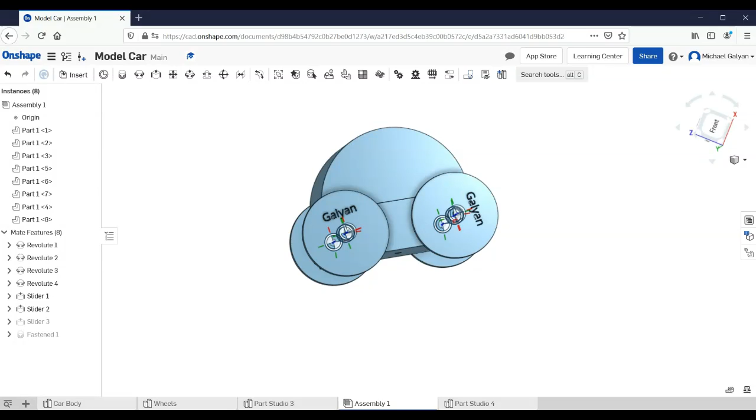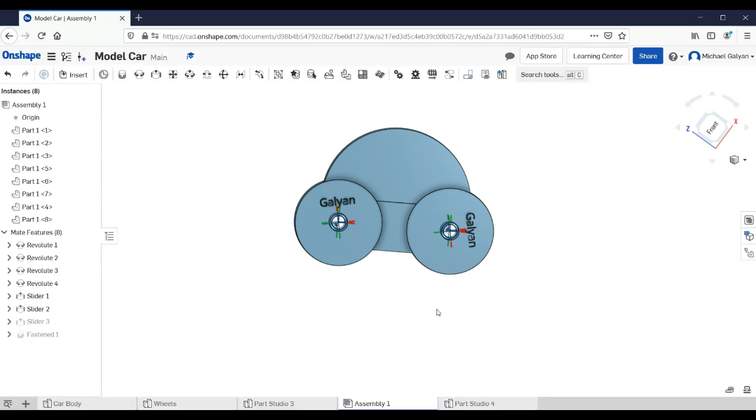We were building this model car here on Onshape, and we left off here with this car. When you start working on 2.1.4, it's going to ask you to make a drawing, and there are a couple things that'll make life easier for you when you go to make this, because there's a couple problems that I found out. People were like, hey, I can't get this to work. It's not working right. It doesn't look right. And I went back and I noticed it too.

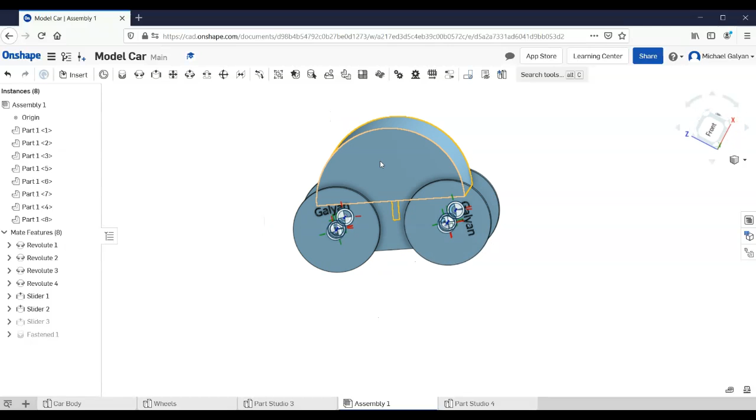So the way you make a drawing, we've got our nice assembly here. Again, we've got our car, 4 wheels. Remember, we have the axles. We've got this top part here. And actually, I'll show you the top part. If I didn't get to show you the top, I'll show you real quick the two mates that put that top together. So the top is just right here.

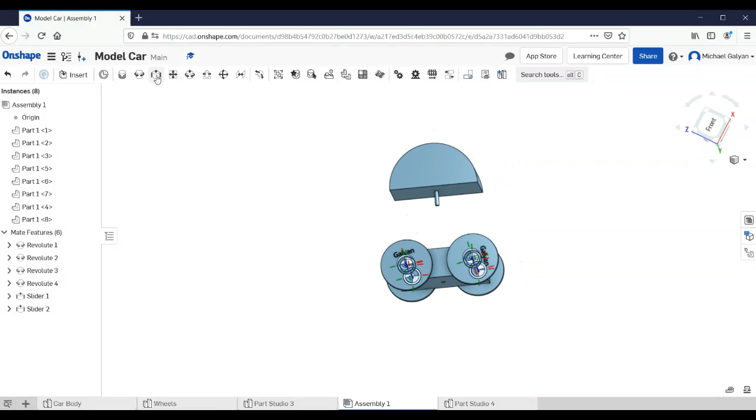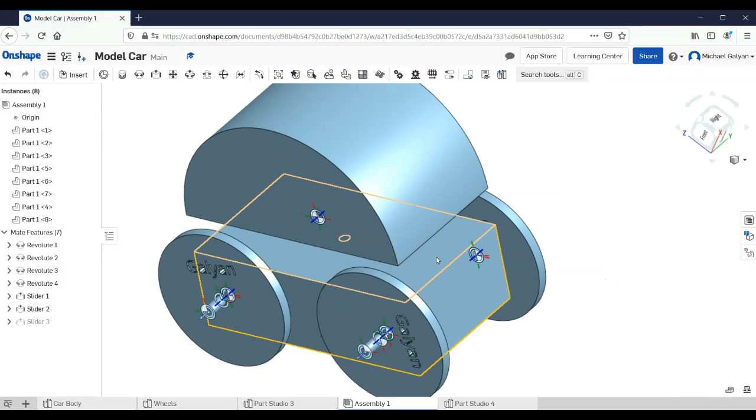The two things that we use to put that together are a slider mate. So we pick a slider and we zoom in, we select that. Oops, it'd probably help if I zoom out a little bit. And then we select that. Okay, and that puts that peg in the hole, but if you notice here, it's not flush. So we're going to do a fasten mate here. And then that will let us select this face and then rotate and select that face.

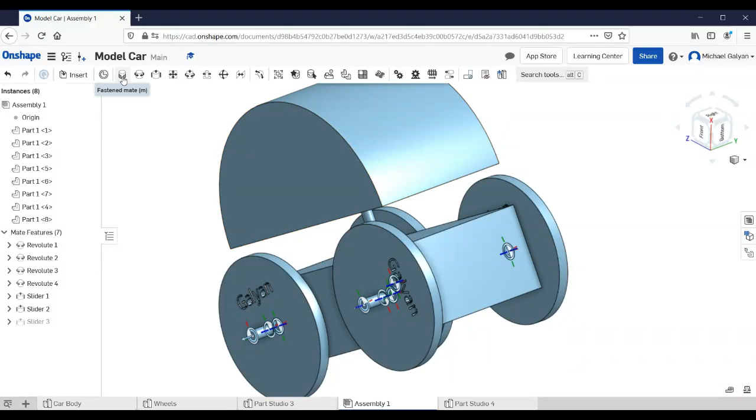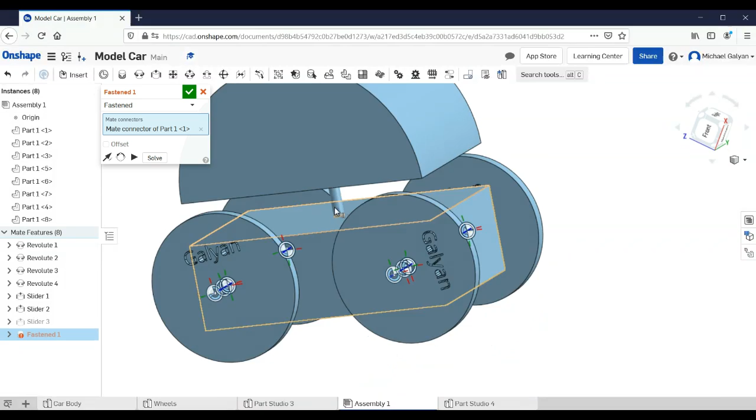And that did not do what I wanted it to. Hold on here, let me try that again. Fasten mate. Select that. Select that face. Select that face. It's doing it again. Hold on here. I just had it. There we go.

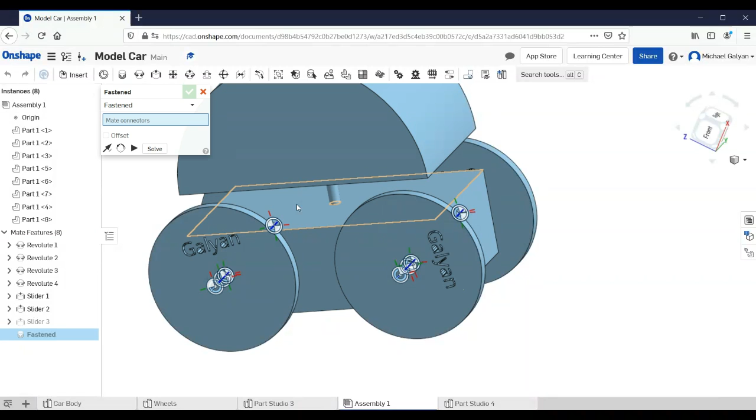I had to get it where when I highlighted it, if you look at this mate here, notice how there in the circle, that little thing, when I first did it, see how that little thing there tells us that we can mate that? Well, I just undid it. There, now I can do it. Same thing here, and we're good. So that's how I did that part.

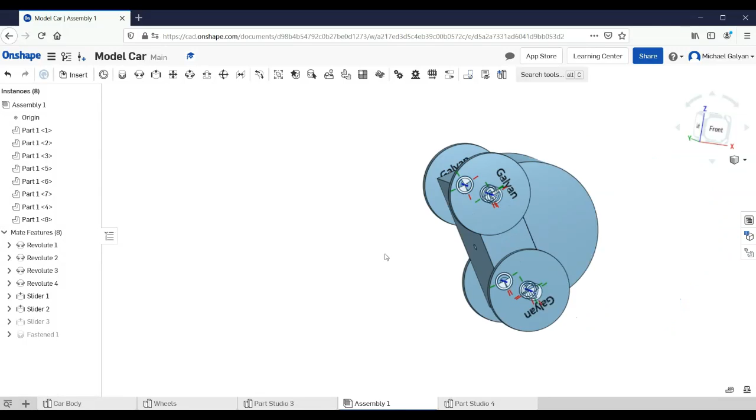Now, we go to make a drawing. Okay, wonderful, so we look at that as our thing. When I click front view up here, this has been part of the problem, the car is at this angle like it's doing a giant wheelie. And when I go to make a drawing and I click the plus sign down here in the bottom left corner and click on create drawing, and you want to select ANSI B inch, that'll be fine, hit OK. What will happen is my car will look like it's doing a wheelie in my drawing, which is not what I want.

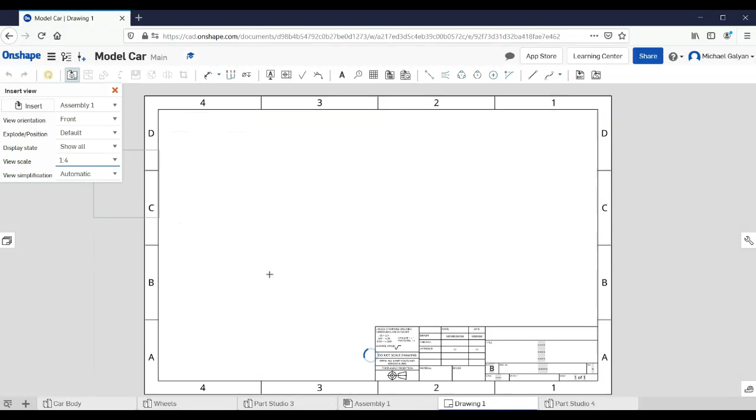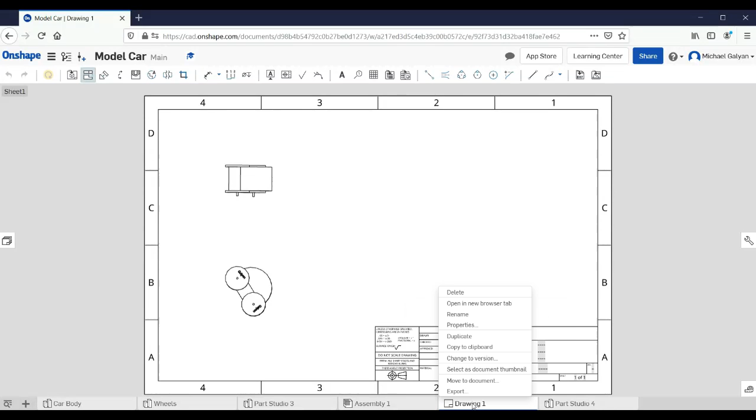So I have the drawing here, and I'm going to select my assembly. Assembly 1, the default here is a front view. And what you notice is if I lay that in there, it's got my car doing a wheelie. And if I put in a top view, the top view looks weird because it's got the car at a wheelie, and it messes it all up. So what we're actually going to do is fix that here in the assembly before we start doing anything with the drawing. So we're just going to go ahead and delete that there, and we'll go back to our assembly.

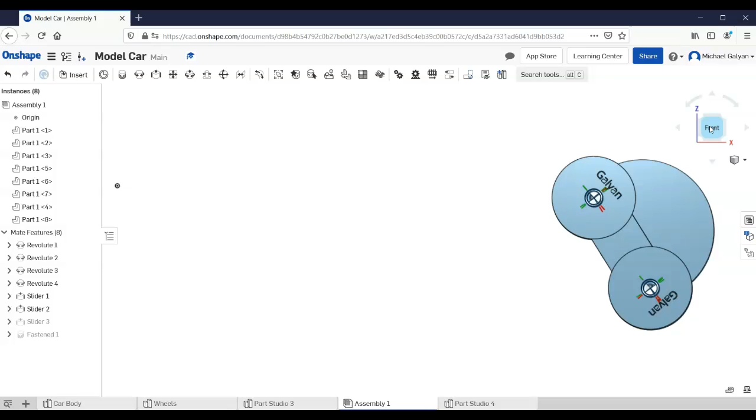And the way we do this is you always want to build everything off this front view. So we're going to take the body of the car, because we constrained everything to the body of the car. We constrained the wheels to it, we constrained the axles to it, we constrained the top to it. We're going to take the body of the car and rotate it so that it's oriented the way we want.

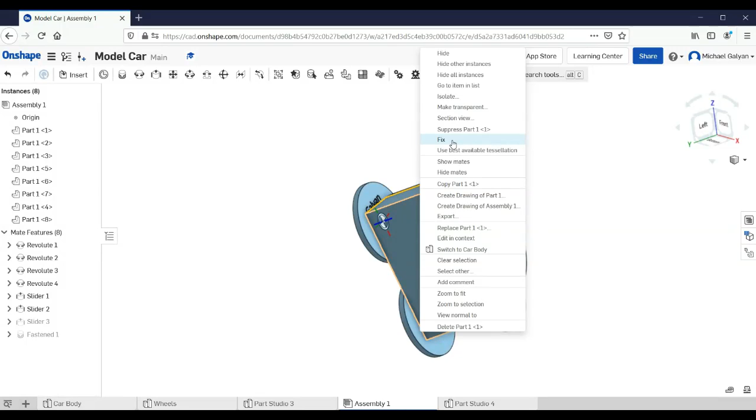Now, ideally, when we first build this car, we would get the body oriented how we want, and then we'd use this tool right here where you right click and hit the word fix. And what it'll do is lock it in place so that it's always the way we want it. But most of us didn't do that because I didn't tell you to do that, and we don't know how to do that. So it's okay.

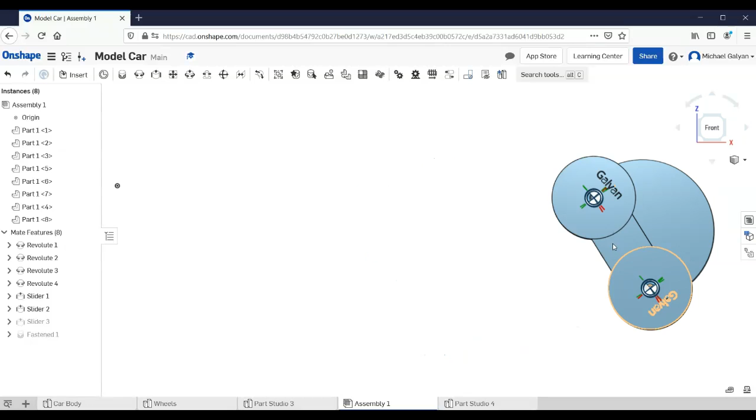We'll get this fixed. Now, what we're going to do, we're going to click on this, and when you click on it, let me get it actually in an angle. So when we click on the body, notice how there's this circle with these arrows coming out of it. Those arrows are the directions, X, Y, and Z, and these little circles with lines on them on the end are ways that we can rotate the car.

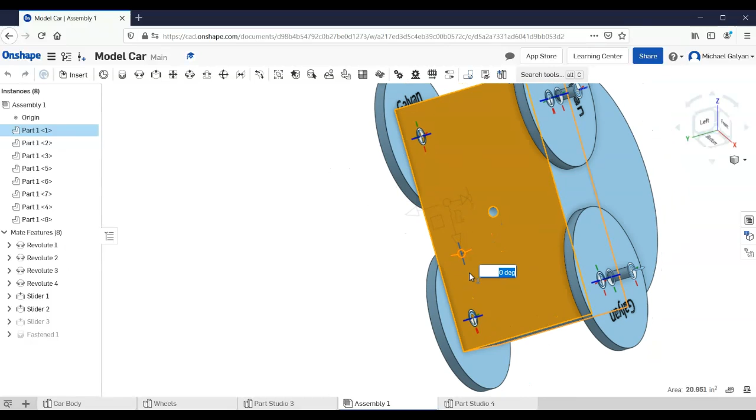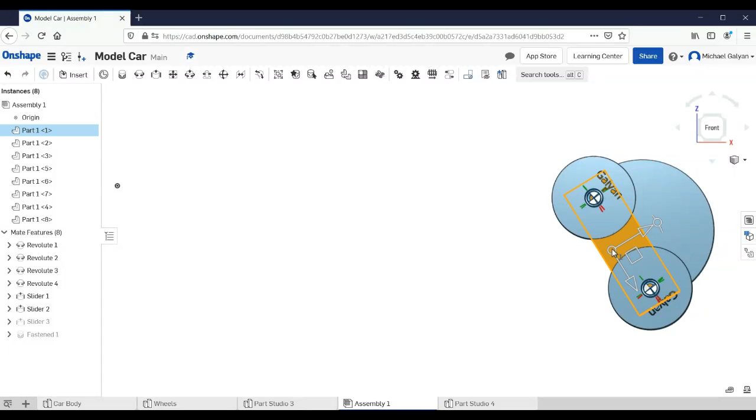So if I click on one and start dragging it, notice that the car rotates. And don't worry about the axle coming out right now, it's not a big deal. So what I want to do is use those to try to rotate the car to where I want it. In this case, all I have to do is rotate it down about right there. And that's got me about where I want it.

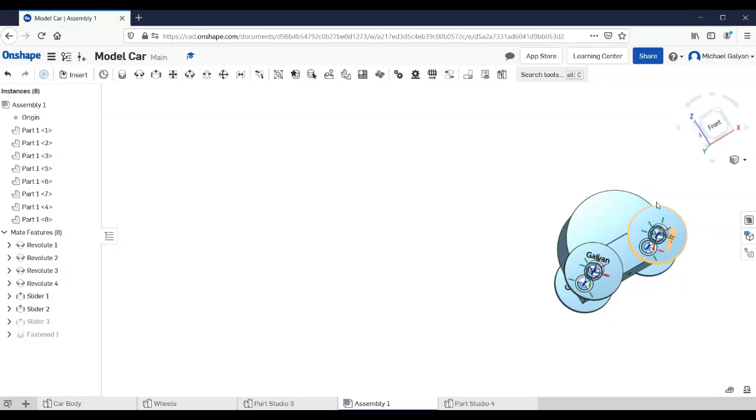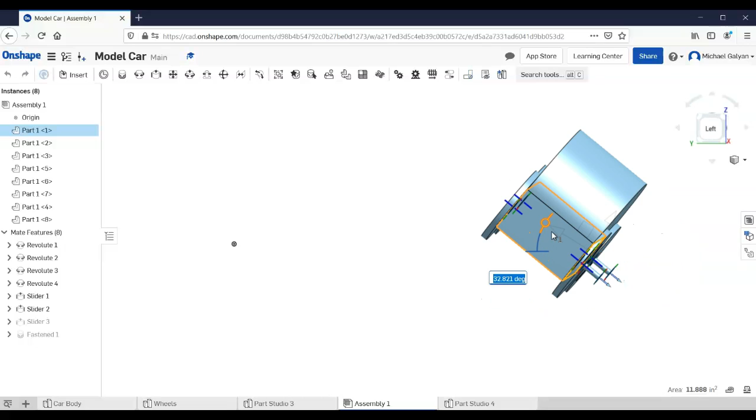Yeah, that looks good. When I click front view, it puts it there. I don't know why it's offset. But you may need to do some others. So you may need to use this one and rotate it up or back or whatever way you need to rotate it. You could just click it here and rotate up or down if you need to. And you can even type in and get real specific with the degrees that you want.

But once you get it the way you want it, then we're going to find the front view, click front, and then we're going to click on that, and now we're going to do our fix. And it'll fix it exactly where we want it. Now, I've got it all set up. I've got it where I want it. Now I can go and start doing the stuff that I want to do with this.

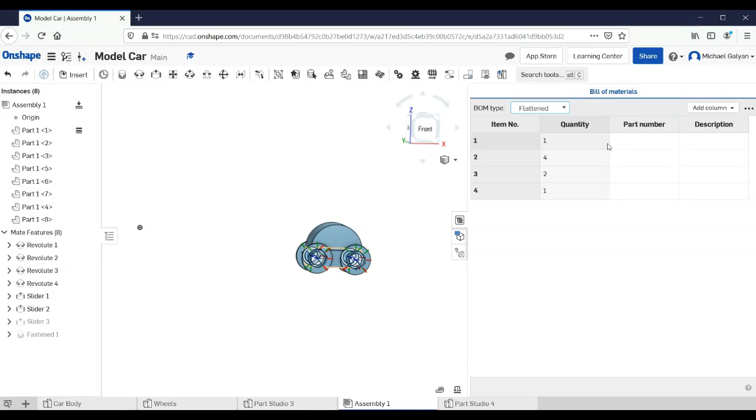Okay, so the first thing I want to do is over here on the right, you see these little things that we've pretty much left alone the whole time. BOM table, that's bill of materials. I've already updated these, but here in Onshape, it's called a bill of materials. In Inventor, it's called a parts list. You see item number 1. That's your car body. That was the first part you made. There's one of them. And you can type in a description here, car body, to tell what it is.

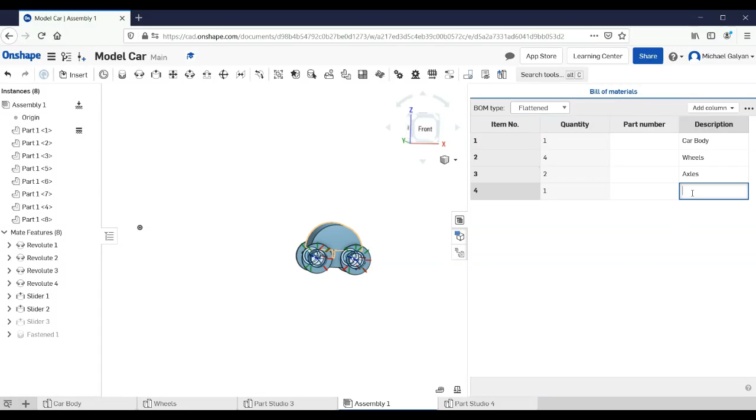Item number 2, that was the second thing I made, which was the wheels. There's 4 of them. You can put wheels. Item number 3 was the axles. So we can put axles. And item number 4 was the top of car. So we can just put top of car. And we're going to leave those descriptions there.

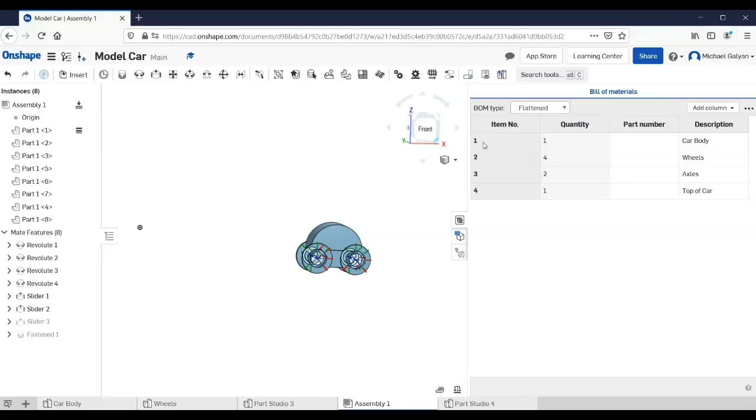And while you're probably not going to forget the parts in this little thing, when you get into bigger builds where you've got 10 or more parts, it's nice to have that bill of materials. You can quickly click over here, and when you see the different parts, you can see what they are. It's also going to help us with our drawing, as you'll see in just a second.

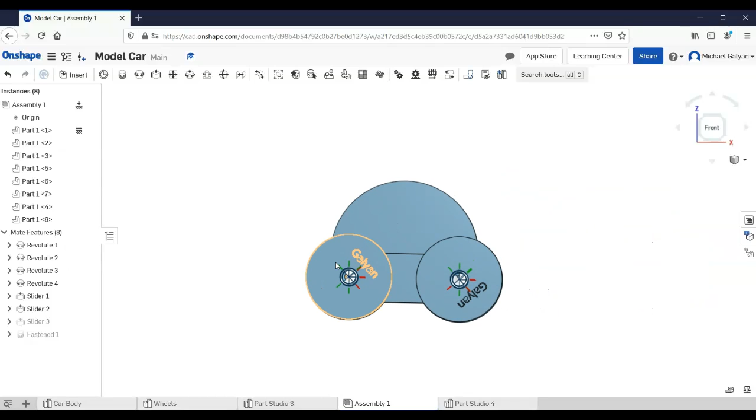The other thing we're going to do is make an exploded view. An exploded view is where we take the different parts and explode them out so that you can see all of them and see how they fit together. Now, unless there's a way to do it that I still haven't figured out, which there's a very good chance of, I don't like exploded views on Onshape very much. They're not nearly as good as the exploded views on Inventor, but they'll have to do because that's what we've got. So you click over here, you have bill of materials, configuration panel, and exploded views.

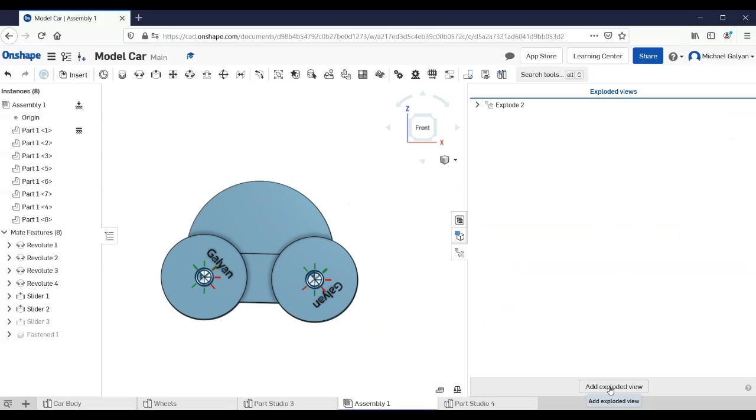With exploded views, you can hit add exploded view. They're just calling it explode 1. With explode 1, you're going to click on each part individually, and then use those arrows to drag it away from the rest of it. And then hit the check mark. I'm going to click on the wheel and drag it away. Hit the check mark. And I'm going to click on this wheel, drag it away. Check mark.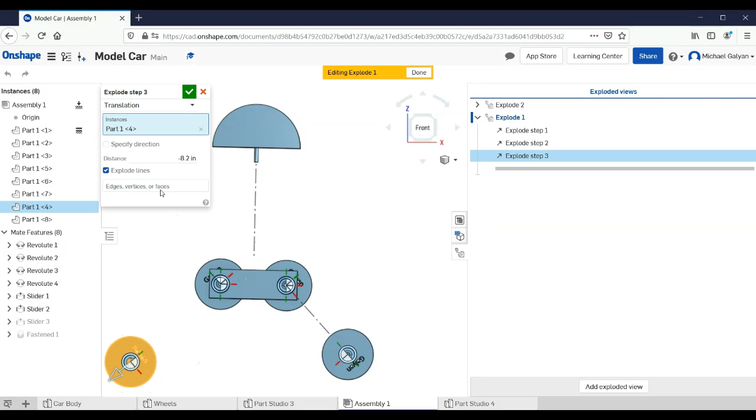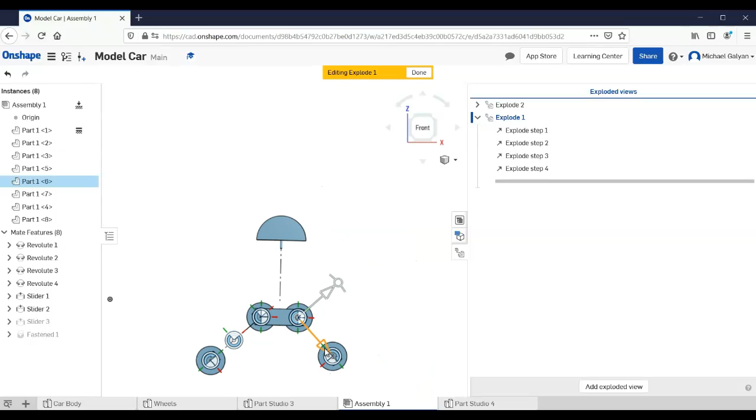Now I'm going to do the axle. Oops, not too far. Drag it away. Check mark. That axle. That wheel. So what I wanted.

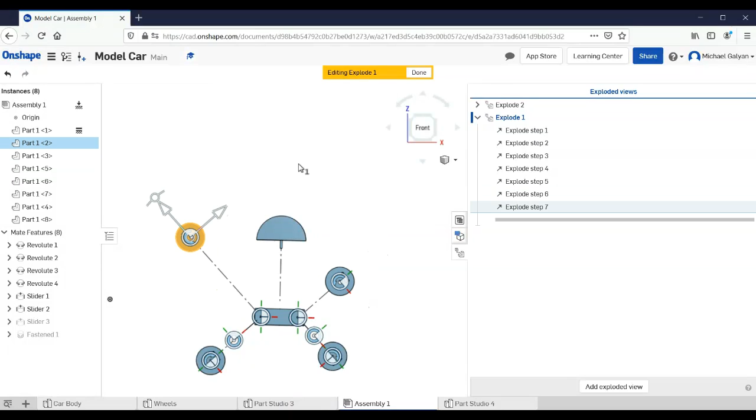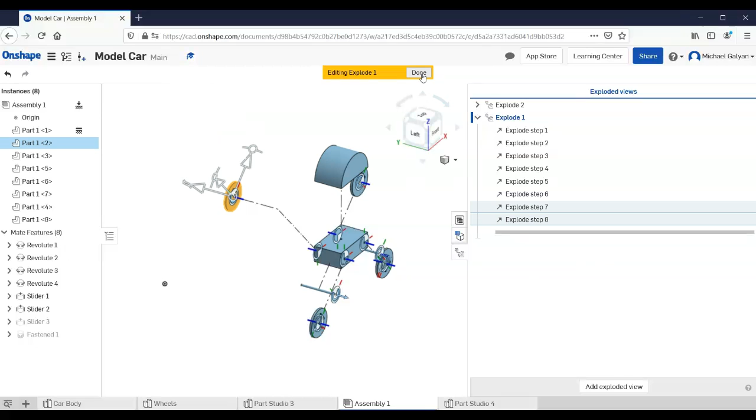And now, the reason this is handy, then we can hit done here. The reason this is handy is if I say explode 1, I could look at it here and I could see how all these different parts fit together, how they all come when they all fit together. So I've done that, and I can hit done when I'm done with it. And it'll take it back to a normal looking vehicle here. I can go back to my front view.

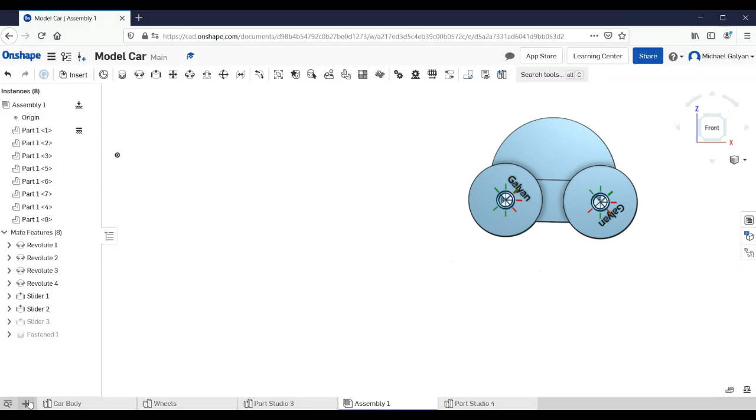Now, what I'm going to do is I'm going to finally make my drawing. Now that I've got everything the way I want it, I'm going to make my drawing. So I'm going to hit create drawing here. Again, my ANSI B inch is what I want for the template that I'm using. You may have to search a little bit to find it, but that's what you usually want. Again, I have slow internet here, so it's taking just a little bit longer.

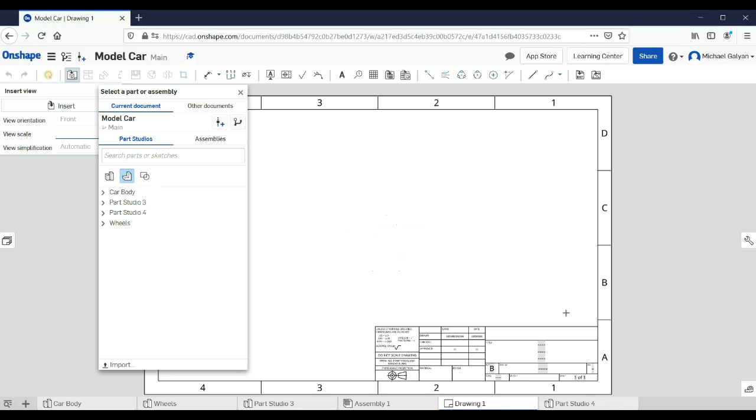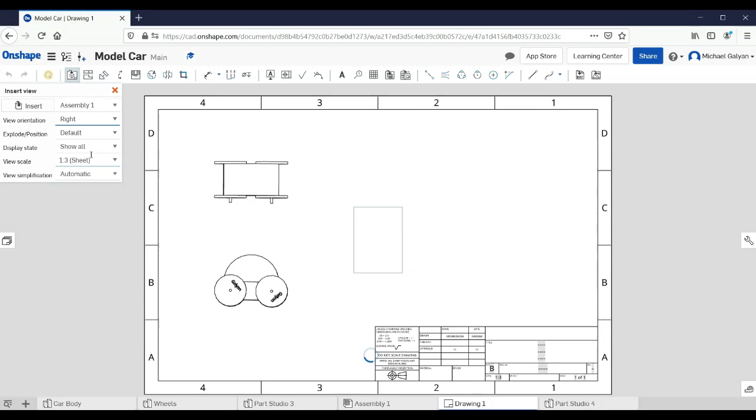So with the drawing, assemblies, I'm going to choose my car again. And you'll notice now my car is in the correct orientation. So my front view goes there, my top view goes there, and then I have to click over here, insert again, and if I want a side view, I click on right, and I can put it right there. Okay, and I've got my car all inserted there. Computer's thinking about it for a second.

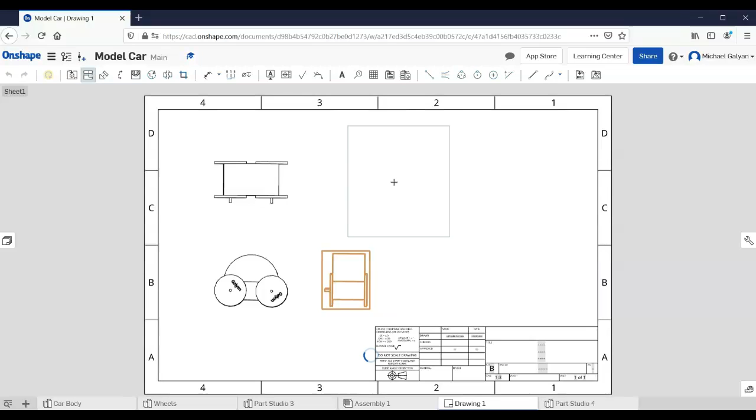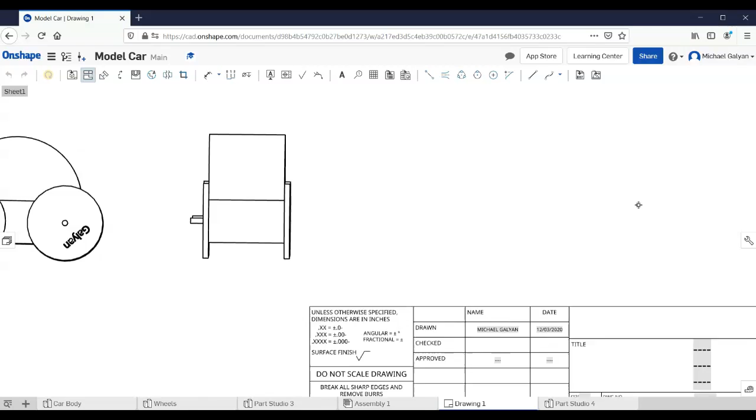Now, what I'm going to do, I can put an isometric view right up here if I want. There we go. And so now I've got my multi-view drawing here. You notice a couple things about the sketch. It tells important information such as my name, the date. I don't know why it says 12/3 because it's only the 2nd. Unless this is thinking I'm European or something. And then you could actually click and you can change some of this stuff. You can put notes in here and change the title, materials, things like that.

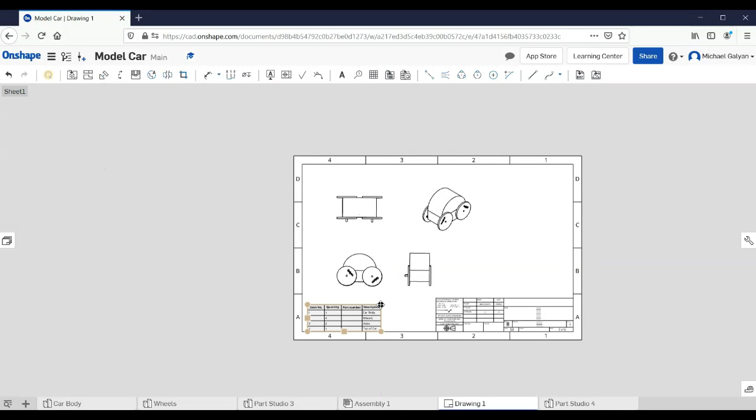But what we're going to do first is a couple of things. So the first thing we're going to do, we're going to put a parts list down here. So if I go up here, there's a tab that says BOM table. And we filled out that bill of materials. We're going to put that down here in the bottom left corner. And you'll notice it now has each part. It's got the quantity of the parts, and then it has a description, so what the name of the part was there. So now, if I've got something that's 10 or 12 parts that I've assembled all together, I can see what part is what.

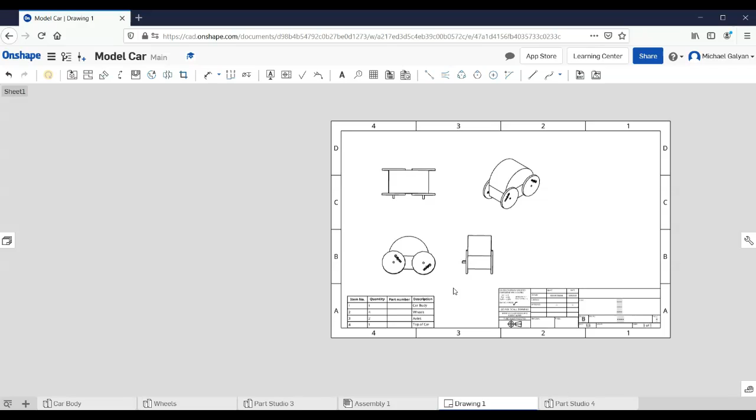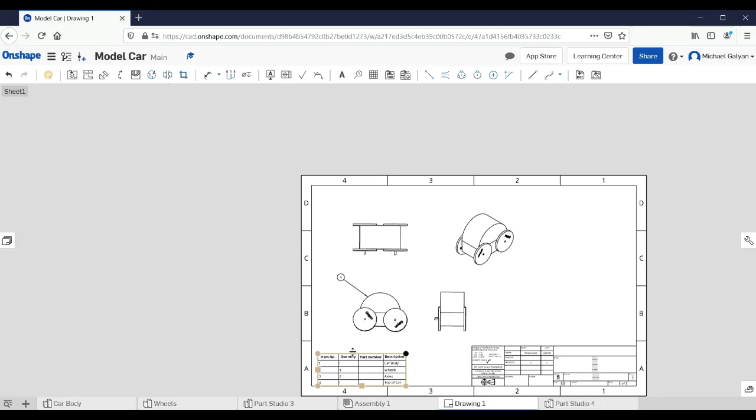Now, the other thing that's going to be handy with this is I can use these little balloons. They call them callouts here. We call them balloons on Inventor. And I can click on these parts and notice that it's now made number 4, which was my top of the car. It automatically knows that that's number 4. If I want to do my wheel, it automatically knows that the wheel is number 2. Now, I do not have to do all the wheels. I can get by with just doing one. And then I can even do this. And I can do the car body.

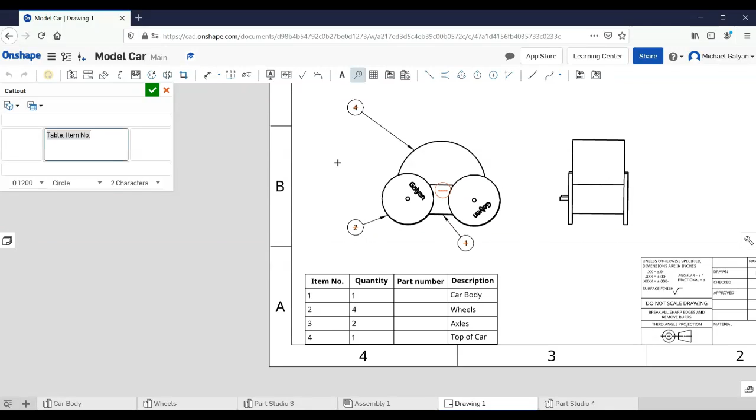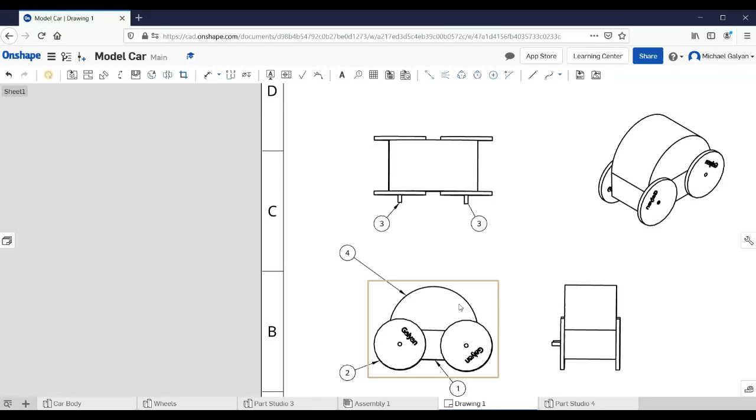Now, we can't really see the axles very well from that view. So what we're going to do is we're going to go up here to this view. And we're going to find our axles on this view. And if you've got something that's hard to see, if you want to show that both axles are there, you can do that, and it tells us that those are both part number 3. So this will be handy if you've got a bunch of different bolts or screws. You could put each one in and say, hey, this is exactly what it is. But notice again, the computer knew part 1 was the car body, so it automatically made part 1 that. Part 2 is the wheels, and every wheel that I make a callout of, it will make it. Well, I clicked on the car body there.

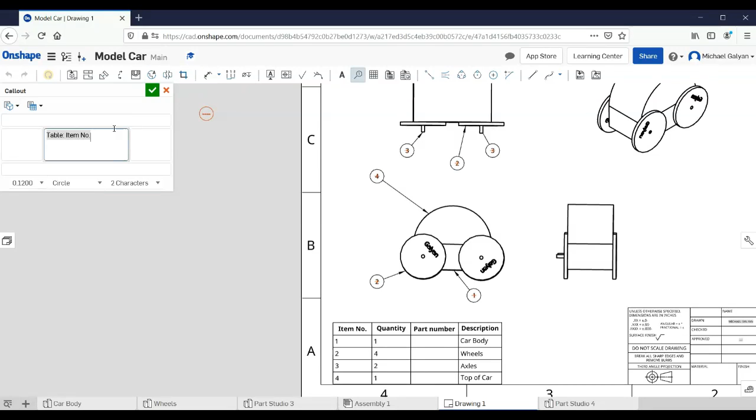But every wheel that I click on, it would make it number 2. And you can do that, and we call those call outs or balloons. And you can change some of the wording and stuff here, but that's how the parts list works and the call outs.

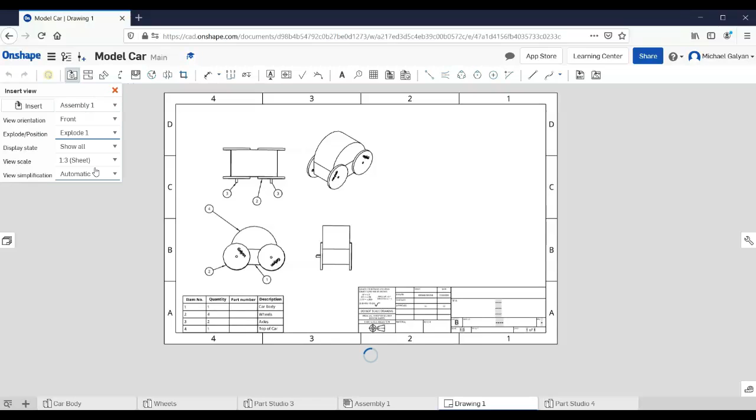The next thing we're going to do is we're going to show that exploded view, and we're going to put the exploded view right here. Okay, and that'll show the people how everything fits together. So I'm going to click insert here. And now you notice where I see explode position, I can do explode 1. And now it's a little big. I made it a little big there. I can put my exploded view right there, and it shows everybody how it fits together.

Now again, I didn't do this perfectly. There's some better ways to do exploded views and whatnot. But you could put your call outs on there as well. So if you wanted to put your call out to there, I could say, hey, there's an axle, or hey, there's a wheel, or hey, there's the body of the car, or do whatever it is that you want to do with your exploded view. But again, this is really handy when you've got lots of parts.

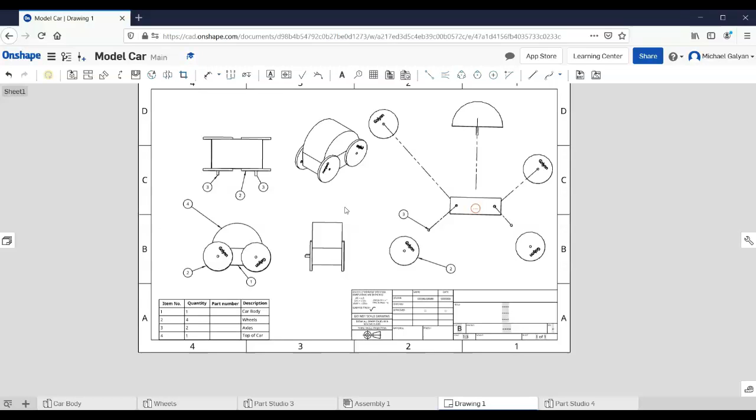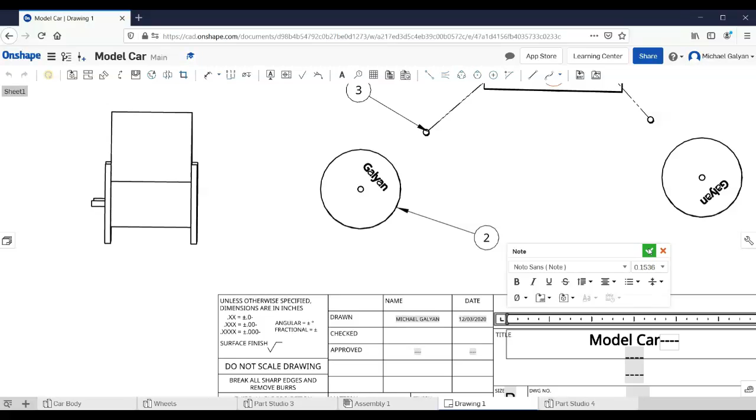The last thing I'm going to show you here on this video is, again, we talked about changing some of this stuff. If I want to change the title here, I can click on this, just double click. It's going to make a note, and I could just type in model car, and it's going to put a title in there called model car. We could do this, it's got the scale already. If I want to put the material in here and I want to say it's made out of plastic, I could do that.

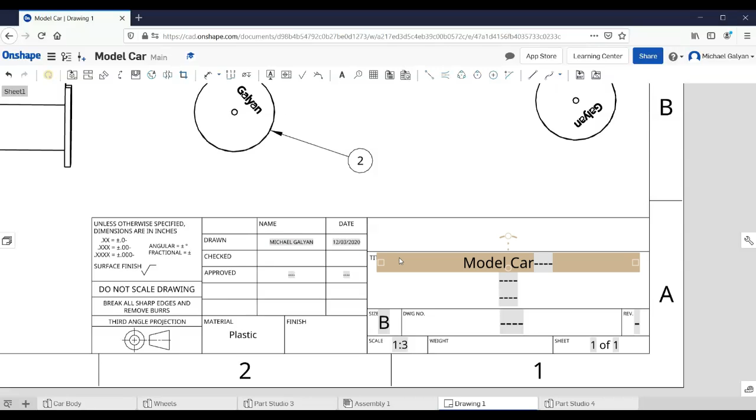And what this is helpful for, this tells me who made the part. I can just quickly see, hey, who made it. But if you were making this as an actual project, that puts all your pertinent information right there. The other thing over here, we were talking about tolerances right before Thanksgiving break. You can set tolerances here, and this is general tolerances. So I could put in here general tolerances, and they're already set up for me. I can do the same thing here.

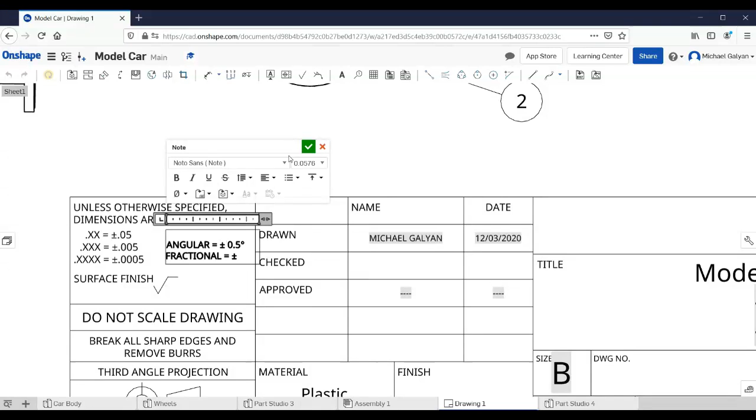The other thing, obviously, we can dimension all of our parts. We've done that before. It's usually nicer to dimension on this view, but you can dimension on the exploded view as well if you really wanted to. But we're not going to dimension it right now.

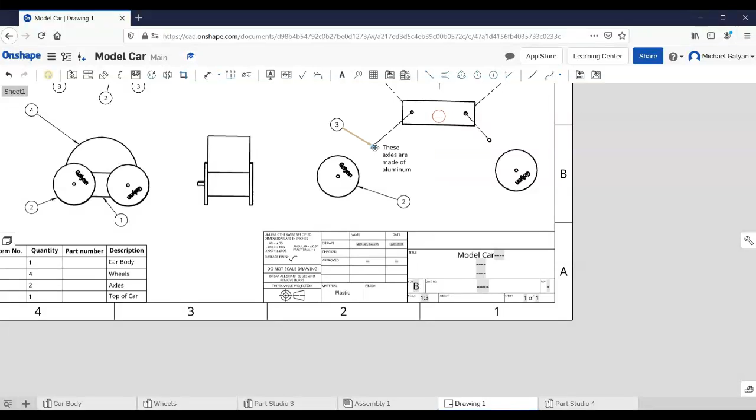The very last thing, I think I said last thing, but the very last thing, if you want, you could put notes in there. So if I wanted to put a note right here, and I just want to say these axles are made of aluminum, I can do that. And tell myself that these axles are made out of aluminum, put all kinds of notes in here.

So this is the drawing. This is how to make an exploded view. This is how to do the balloons or the call outs. This is how to make a parts list. So there's a lot of stuff on this video, but it's a very informative video. And then obviously it autosaves. The other thing you can do, you can insert images and stuff. I don't know why you need a reason for that, but you can.

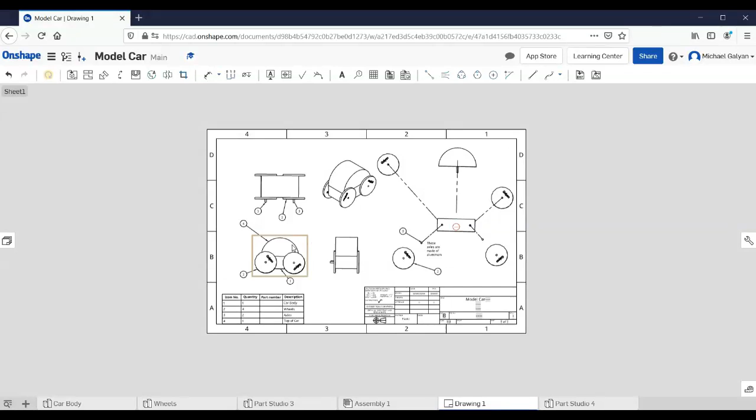So with that, I'm gonna leave you. This is what we're doing today. I'm stopping here because a lot of people struggled even with just the car. So if you didn't get the car finished, you can finish the car and then do this part today. What I want you to do is get to this part. You're going to have your multi-view here with your balloons. You're going to have an exploded view here with balloons.

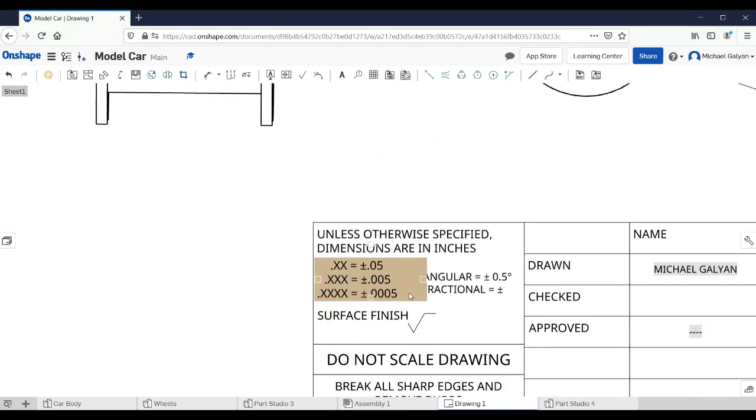I want you to change these tolerances exactly as I put them here. Okay, everything's 0.05, 0.005, 0.0005. Parts list, and then change it to say model car, and then put this here: these axles are made of aluminum. I want you to do that. You don't have to turn it in or anything yet. Just hang on to it for right now, but that's our assignment for today.

So hopefully I got everything in. I know it's only about 20 minutes, but like I said, I know some people were still having to finish up the car or having problems with the car. And I'm going to float around whoever is actually in class because of the blue and white days and help them out today.